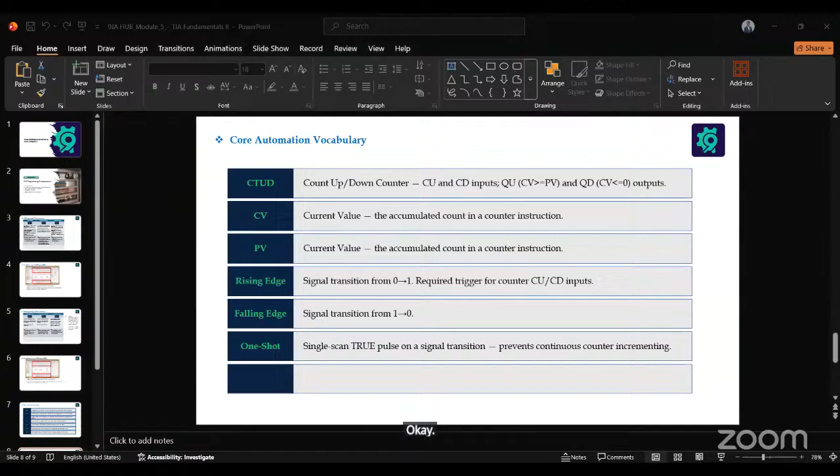So for today's class, we would continue on TIA fundamentals. We'll be looking at some other instructions that are in TIA. We've made use of move in the last class. So yeah, we'll be looking at counters and timer.

During the first TIA session, I did a simple star delta program and I was talking about TON, TOF, on delay, off delay. Some people were like, okay, how does it operate? What is on delay? Why are we using on delay? Because for someone hearing that statement for the first time, it would be like, why not try off delay? Why are we trying to delay the on sequence? Why are we not working on the off part of the program?

So we'll be diving into it today and you would see why we made use of the on delay and not the off delay the other day. By yourself, after this session, you should be able to know what to use and when to use different timers or counters for each operation. At the end of this session, we want to do a simple PLC program, like a traffic light control kind of program. So let's get it started.

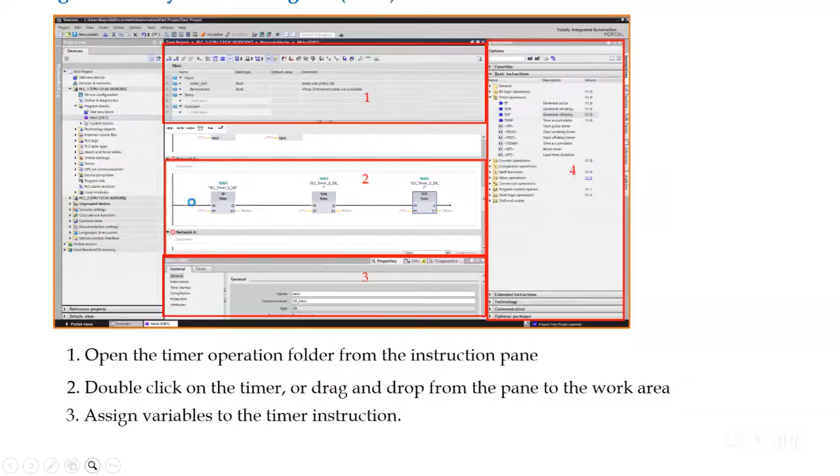So this part—let's say we put a normally open contact here. I hope you can see my cursor. Once this normally open becomes normally closed, the timer does not wait for another signal; your preset time just starts counting, starts elapsing. Let's say you set 5 minutes or 5 seconds—once this becomes normally closed and receives the signal, it just starts counting down: 5, 4, 3, 2, 1. Then once it gets to 0, the output comes on for the on delay.

So it doesn't need a signal for confirmation—it just needs one pulse signal, a signal that comes once, not one that comes frequently. For a counter, it needs a continuous signal—this signal comes once, then comes a second time, then again. I'm trying to think of a very good example where we made use of a counter. I can't place one right now, but maybe before the end of the session. So for a counter, it needs a continuous signal.

Mostly it's always connected to a sensor. So once you have your sensor, it starts counting—okay, this one has passed, this other one has passed.

Let's use a traffic light as an example—not the conventional one, I'm talking about the one for pedestrians. Outside the country there are some where you can press a call button. The call button lets the driver know that someone is on the zebra crossing. Then after a certain time, the traffic light goes from green to amber, from amber to red. Once it's red, the pedestrian can cross, and the driver has to stop.

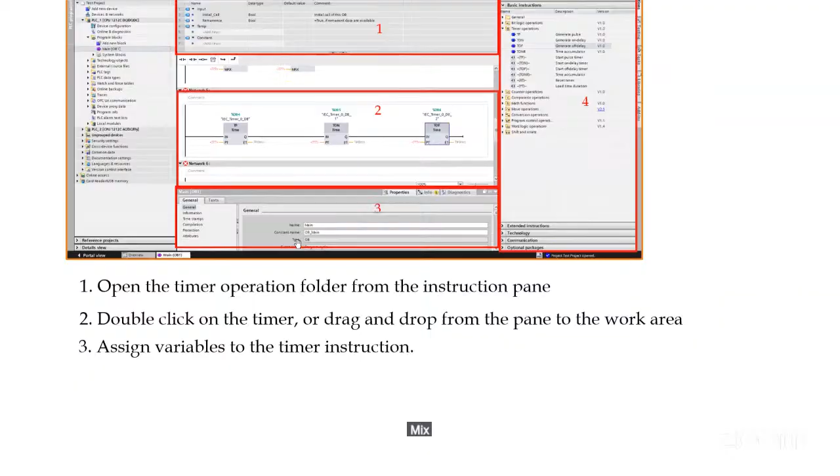So we've talked about counters, let's look at examples. This is a count up counter with a reset value. Most times a counter needs a reset because once it counts up to that value, you need to press a reset so it goes back to zero and then starts receiving a signal again to start counting. Then there's the preset value, that's where you put maybe you want it to be a 10 count, 20 count, or 30 count, whichever way.

Exactly, this is a very good example. Let's say you work somewhere they make biscuits, let's look at Prime Biscuit for example that produces cream cracker, Beloxxi, and all of that. They want to track the amount of cartons per day or thereabout, so they must have a counter operation going on.

Then it counts how many cartons are passing. Once one carton passes, it registers it in the counter's block. Once another carton passes, it registers it.

That way they can track the production and the efficiency of the operation. They can't use a timer in that operation because they wouldn't be able to track how many are passing. This one counts in units, and the other one counts in seconds, which is timer.

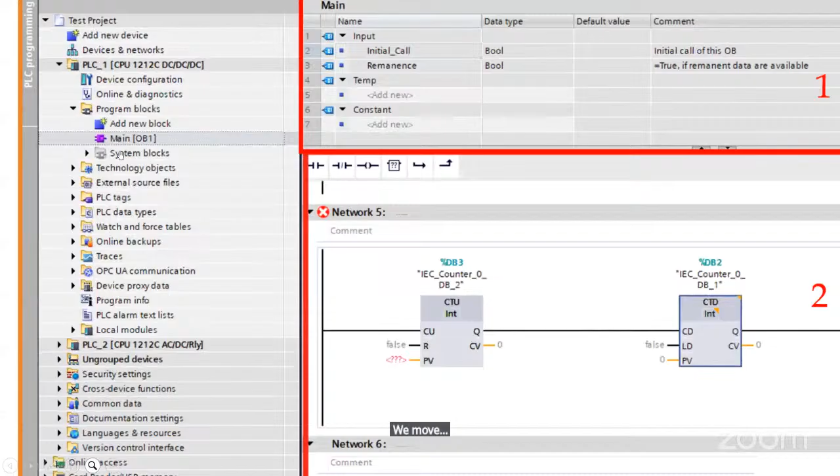So I think we're all clear with this before we move on. This is how it will be. For the TON, these are some vocabulary you mostly see so it doesn't seem strange. There's no priority because what happens with count up down...

How will I put it? Once it counts up, the output, look at this, let me go back, look at this. It has two outputs, QU output for count up, QD output for count down. So what happens is once it counts up, the output for count up becomes true. Once it counts down, let's say you set the preset to 5 and it's counting 1, 2, 3, 4, 5.

Once that 5 gets to it, the count up becomes true, the countdown becomes false. So initially, what's this thing? The default state for the countdown after you set your preset value and everything will be true until it counts down, let's say 5 have passed through it, it will become false and the count up will become true. So it's not like it needs priority or anything, it's just like on-delay and off-delay.

One will stay on for so much time. The countdown will stay on for the amount of time you say it should count down. Let's say you say it should count down 5, like 5, 4, 3, 2, 1, 0, once it gets to 0 the countdown will become off. But count up, once it counts up to 5, the count up will come on. So I think is that clear?

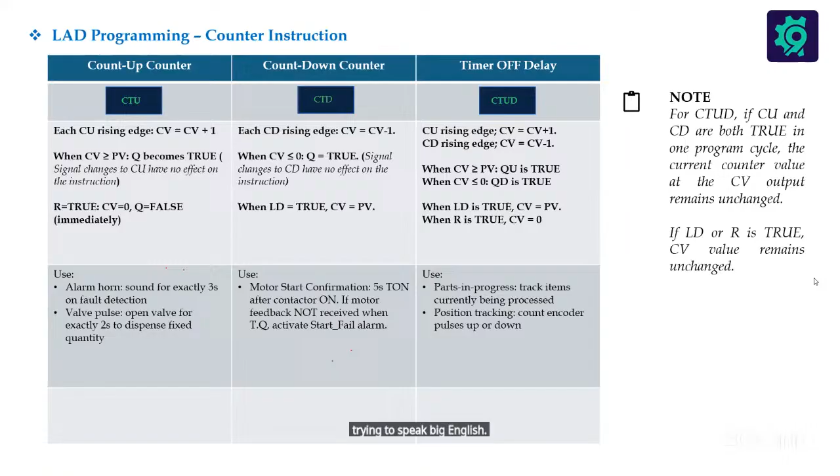So can a counter be used as a timer? Someone even put thumbs up. A counter cannot be used as a timer at times because... don't worry, instead of trying to argue or trying to explain, we'll do a simple example. Let's just stay tuned. We'll make use of a counter and we'll make use of a timer, so you see the difference instead of trying to speak big English. Can a counter be used as a timer? So I think that's all the questions we have.

We've checked this. So we are looking at the core automation vocabularies. These are symbols, terminologies, what you would encounter when you're writing some programs. You can see stuff like TON and you'll be like, how do we get here? What is TON? You can also see stuff like TOF, off delay, then TP, timer pulse, PT. So these are the parameters you have to set. PT, the preset time, the elapsed time.

Then we have elapsed time, count up timer, countdown timer. We have count up, count down. I showed you that. So for the count up, like the elapsed time, we have current value for counter. Current value shows you the amount it has counted. Like, okay, we already have 4. We've accumulated 4 counts, like 4 pulses, like that engineer said. Then preset value. This is the count value you want. Okay, we want you to count up to 5 pulses or up to 10 pulses.

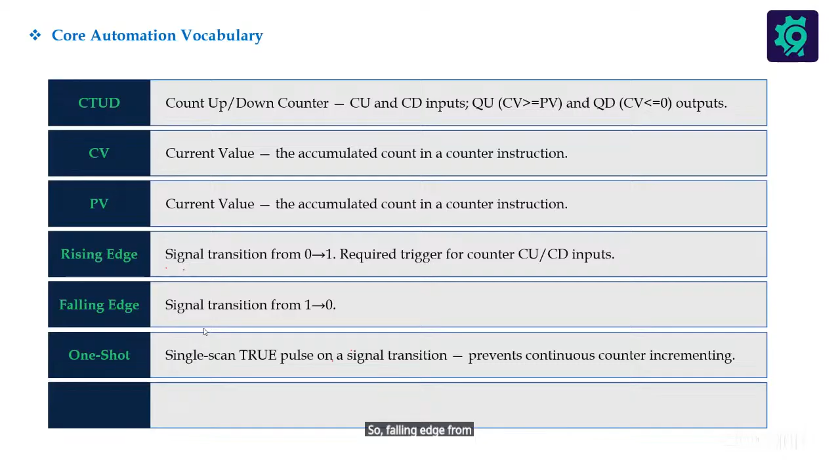Then let's see what else? Rising edge. So signal transition from 0 to 1 required, yes. So falling edge from 1 to 0, one shot signal can be used. So thank you very much. Let's do our normal going to TIA Portal and make use of counters so we can all be sure we're on the same page.

So someone asked a beautiful question in my DM the other day. I can't remember the person's name, but the person's question made a whole lot of sense. So the person was going through the YouTube live and noticed we changed.

So what the person asked was, sir, why do we change from input? I think I replied to the person. He said, why do we change from input to a memory when we wanted to simulate? So I would say there are different types of simulation. No, a counter is not an encoder.

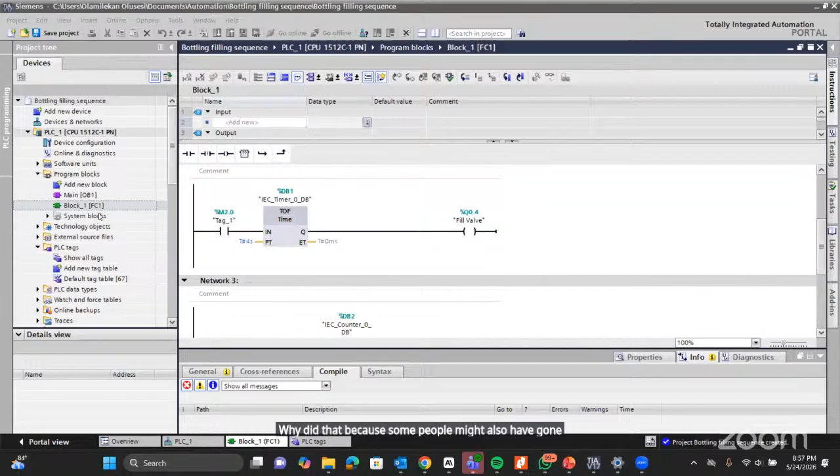So why do we change from an input signal like I0.0, an input address, to a memory bit when I wanted to simulate? I told the person why I did that, because some people might also have gone through the video and have that question. If you want to simulate, you have different methods of achieving that. You can use a force table.

Let me just do an example so we see what I'm saying. Here is a force table. We have watch and force table here. Look under force and watch table. You open. Sorry, please. I just want to clarify that so people are not confused.

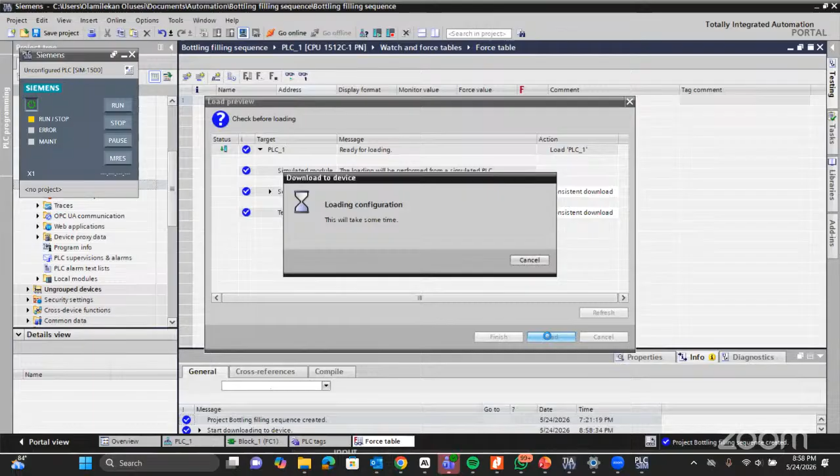I hope by this time we all know how to set up our PLC sim to start simulating your program. If there's anyone that still cannot set up the simulation, please let me know in the chat box. So let's go online. I've not called it in my OB1.

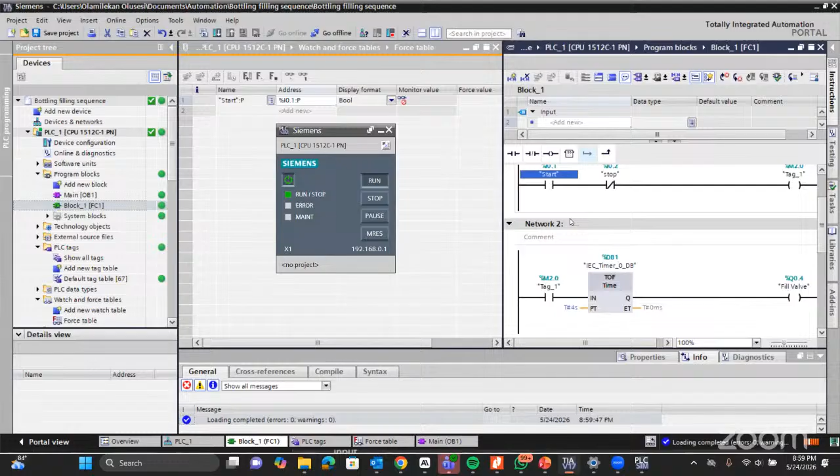Hmm. Yes, definitely. TIA Portal can work without network. You don't need data to use TIA Portal. Why is this not monitoring?

So look at something. Here I did not change it to memory. I forced it. Force bit, then it became one, and then the start push button is simulating like it has been pressed. Let me remove the force now, turn it to 0.

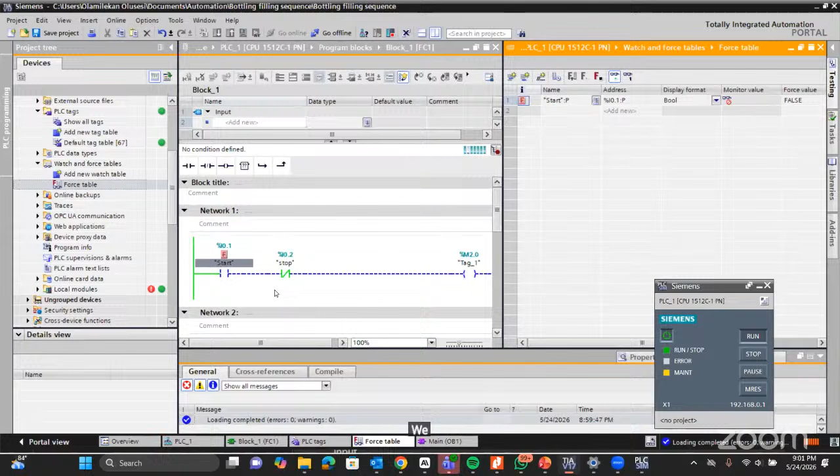It goes off. But if you want to make use of modify, this way you don't need to create a force table. It's another way of simulating signals. You can just come here and modify to 1. You see, it will not work because it's a physical address. But with a force table, it will work. So the reason I changed it from a physical input address to a memory was because we're not using a force table.

So, does anybody have any question on this? Please, if you have any question, let me see it in the chat. If not, let me know so we can continue.

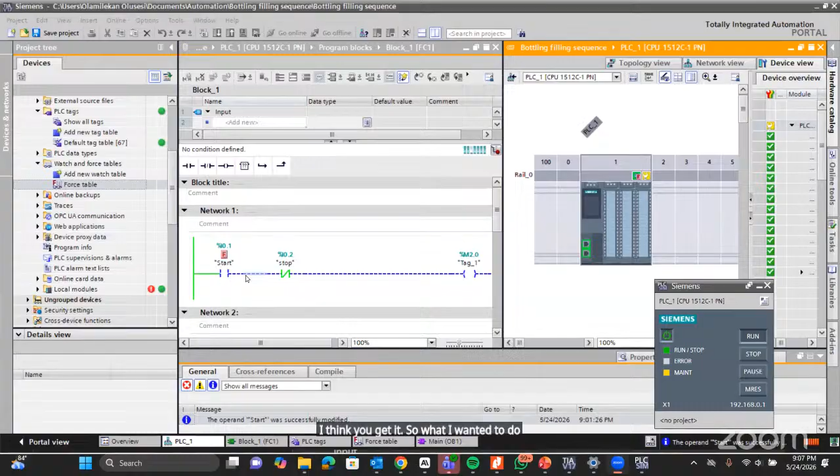So I think we understand this now. For the person that asked why I used a memory instead of the physical address, what I wanted was to be able to modify instead of having to create a force table. So I can also do the memory part here, let's say M1.3, compile and download.

How do I handle multiple inputs that need to run simultaneously for a small project? Exactly, you can create a force table, then put all of them inside. You see the way I drag and drop it there. Put all of them inside, modify, and then turn it on.

So look at this now. Instead of forcing the signal, I can go under monitor, modify to 1. Then it has become 1 here; it's active already. Modify to 0, instead of going through the stress of creating a force table. So I think we're good on this.

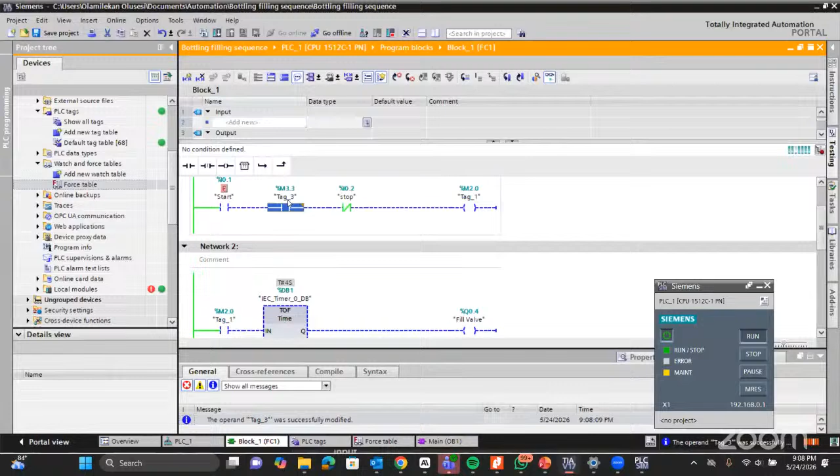Now let's look at an example on how to use your counter, timer, count up and count down. I think I have something here already. This is an off delay timer. For the person that used the off delay timer and had an experience with it, let me display what an off delay timer does for you.

So for this, for the start, let's force value to the start now. Let's force 1, yes. Look at it. The output is already true. Then I brought the output down here. Look at this now, the fill valve. The fill valve is already active. That means, let's say, the filling has started.

Let's now go back and force this back to 0. So that means the start push button has stopped. Look at this. The fill valve will still remain on, will still remain open for 4 seconds before it goes off. Let me increase the time so maybe we can see it. 10 seconds. No, let me use 7 seconds.

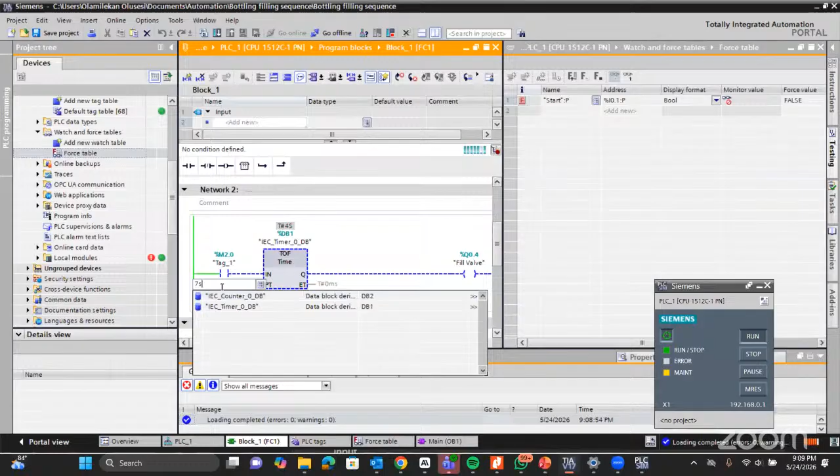So let's now come up here again. Download. Force it to 1. Then let's force it to 0. So look at this. The output is still staying on even after the input signal has been cut off. It stays on for 7 seconds, then it goes off.

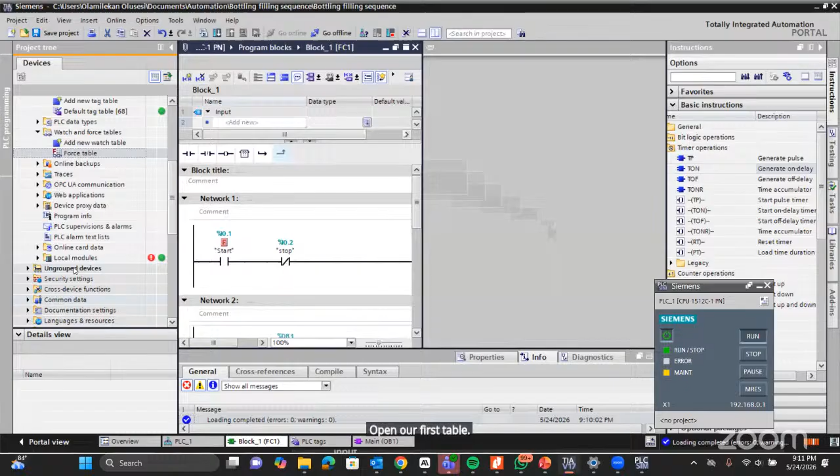So now let's make use of an on delay. Just want to show us what these guys do. Instruction, timer, on delay. Okay. So let's put the same 7 seconds. Let me remove this. So open our force table. So just fix your eyes on the fill valve. Let's force this input to 1 now.

Oh. Sorry, I stopped monitoring before. Hold on, please. Let me download this. Then go online. Let's open our force table. Let's force it to 0 first. Yes. So notice what happened now.

For off delay, the other time, once the input signal goes off, the output still remains on. But for on delay, once the input signal goes off, the output goes off immediately. So let's turn on the input signal now. See, the output does not come on until after 7 seconds.

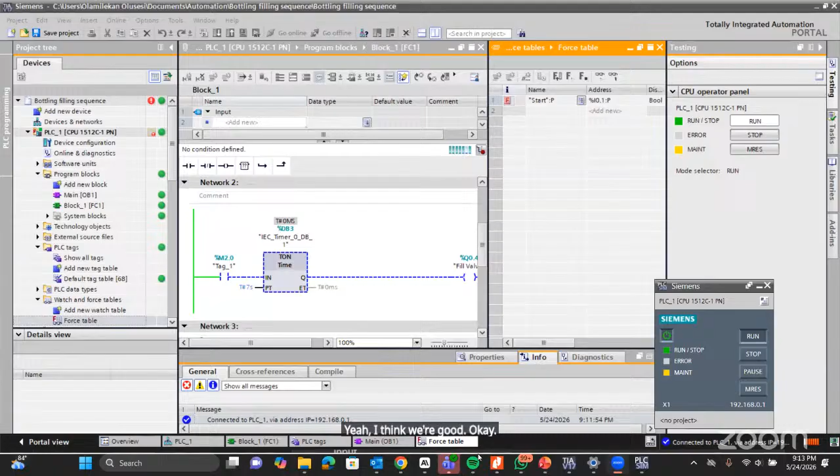Yes, Sarah. Diamond. I don't know why it's always the two of you I'm always calling. Adeboye. I think we're good. Yeah, I think we're good. Okay. Okay, sir. Yeah, let's move on.

So let's go to the counter sequence. Let's make use of count up and count down, then let's do something. So we've seen how this operates now. Let's now go to counter. I think we can delete this and bring in a counter instruction. I think instead of even going through that, you can just bring an empty box from here. Change the name to counter. Maybe we can do that. Nope. Let me just drag it.

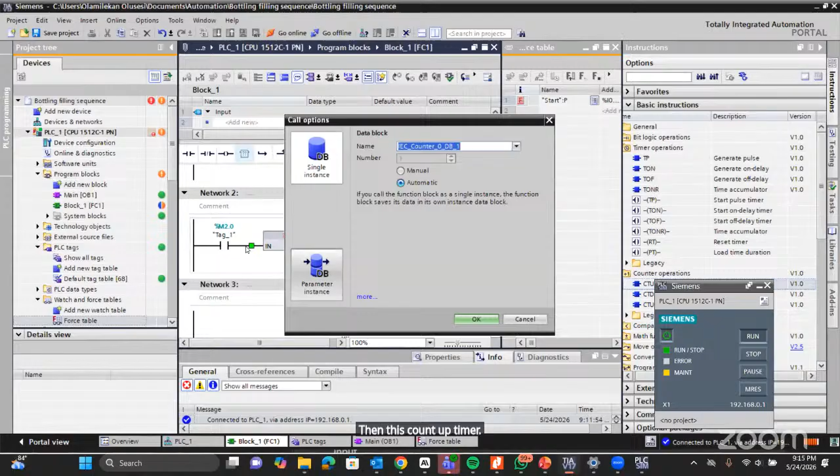So you come to your instruction bar. From your instruction, you can see we have timer, we have counter down here. Then this count up counter. So let's put our preset value to be 6. Then this one will be showing the count value. You can address this to an output. If you want to be showing how many items have been counted, you can tag this to an integer output and display it on an HMI.

So you can display it on an HMI, showing how many people have passed, how many cartons have been packed, and all of that. So let's download. Okay. So look at this. This is the count value now. It's at 0. The preset value is 6. Count up counter. It has not received a signal. That's why everything is still 0.

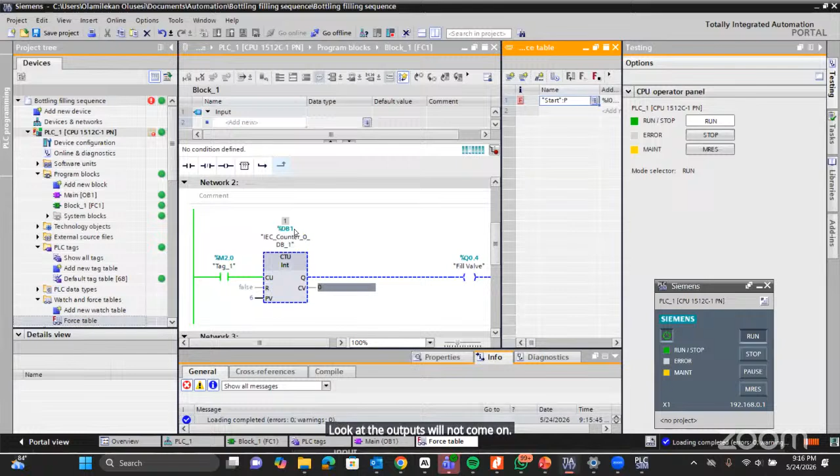Let's change the signal to 1. Look, the output will not come on. But the counter has shown that it has counted 1 already. Let's now do it until we get 6. So what we need now is for the input to go off. I should have just used 3. Well, don't worry. For it to now come on again. 2. Go off. Come on again. 3. Go off.

So this is not like industrial practice. In industrial practice, you can make use of a sensor for this counting sequence. So a sensor might be the one sensing maybe a carton passing, a bottle passing. So it should just be counting how many bottles have passed. So we already have 4. Let's do 5.

5. There's another one first. 2, 6. Look at, on the sixth count, the output became true. So let me now do something. Let's take it to 7. You see it. Okay, no, it's already true. Let's take it to 7 and see what would happen. So since the output is already true, it will remain true even after it gets to 10, 100, 1000, you just continue to count up that way. But once it has gotten to your preset value, the output becomes true.

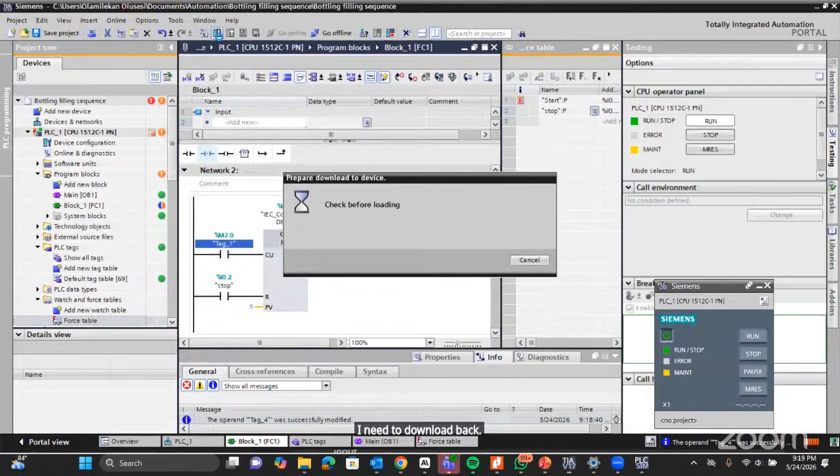Please let me know if everybody is clear on this also. You get the way I did that, the output and the input part. Yes, yes, definitely. Let's make use of a physical address. Let me see, I already have my start and stop. Let's make use of stop. So look at this now. As it stopped, I can bring it to my force table. I need to download back. Yep. So now, no. Let me just change this to 2, so we don't have to start doing the 1 to 6 again.

So let's count. 1 comes on. Okay. Yeah, 1. Then let's force it to 0 back. So on the second count, the output comes on, because I changed the preset value to 2. 0. So now the reset, since it's a physical address, you can force it from here first. Let's force it to 1. Yeah. It will reset it. So it can also be a physical address or a memory, whichever one. So I think we're good now. Let me know if we're good on count up timer.

So let's make use of countdown. I'm not hearing anything, no. I don't know. Maybe. Anita, if you are with us, let us know if you are good. Ayodeji, Nicholas. Are you also good with the count up? So, okay. I think Nicholas is active. So let's use countdown now.

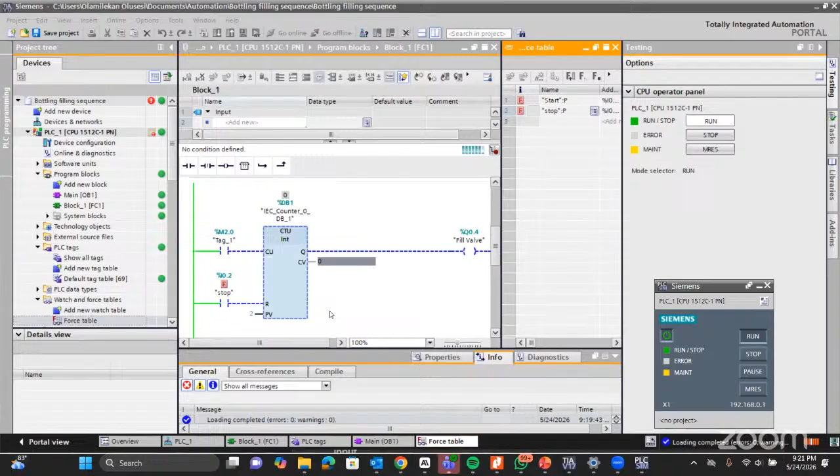Let's make use of countdown. Go to instructions, count down, delete, delete. Preset value, let's make it 3. And let me see if I can. A quick way to also know, let's say you are using a block for the first time, you've not encountered a block before, maybe counter, move block, anyone, and you don't know what parameter can I put in the LD, CD, PV port? You can use F1.

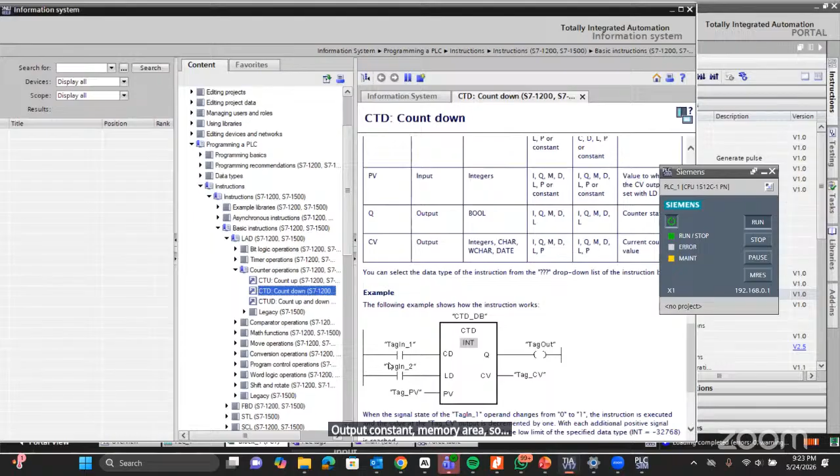Just click on the block now and press F1 on your system. Why is it not showing? Let me see. Okay, still loading. Hold on, please. So it will give you information about that block you brought out. Look at this countdown block, this counter instruction. So it will explain everything you need to know about it. Then about the port that is available, the LD port declaration, you can put an input bit there, in memory, anyone. Look at it, bool, PV. You can set an integer there, output constant, memory area. So you can read about it. They can even show you an example of how they use it.

You see? So this can help you in cases of new blocks you are not used to. So I'm just trying to show us. It's not every time, maybe you are seeing a block for the first time, you don't know why they use it in that program. You just click on F1 on your computers. For some people's laptop, you might need to press FN then F1 before it works. But some people you just use F1. So I think we're good with this. So let's make use of the countdown. We set it to 3 and then let's now download.

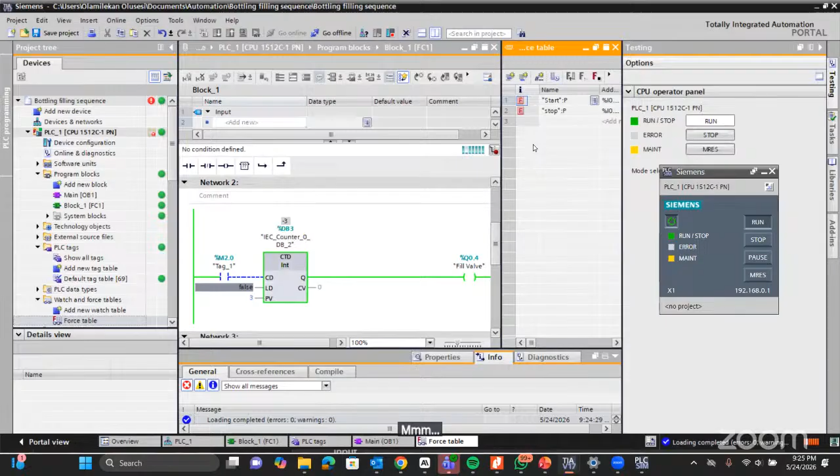What do you notice there now? The output is already true even before the counting operation starts. So what happens for countdown is once it now counts to 3, it resets the output. So let's do that. Let's force it to 1. 1 minus 1. So it's minus 1 from that 3. That's 2 like that. Sorry. Force to 0. Minus 2. Then hold on. I think I made a mistake somewhere. Supposed to reset. Download.

Let's go right again. Let me modify this to... okay. 0, 1, force to 0, then

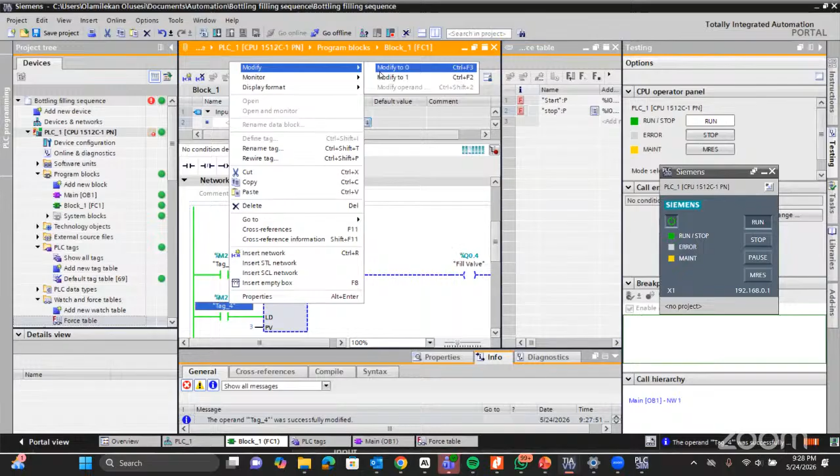So we can now get, the same way a count up counter has a reset, this countdown counter also has a reset. What this countdown counter does is once you energize this, look at this. Let me change. Is there a way I can change this here? Okay. Let me change this to 4. Download.

Hold on, please. Just have to force it. That's why I used to prefer modify to force. It will now start counting down from 4. So initially you need to activate it. Let's say you set your value to 10. You have to activate the 10. You click on it. You can put this to a physical push button or a memory or something just to trigger it. Then once you put it in, it's 4 we're counting down from. Then you start toggling this on and off, the pulsating signal.

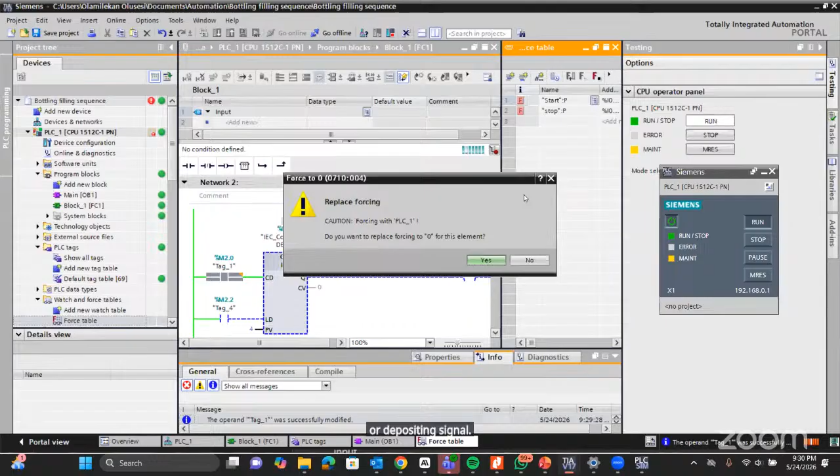Turn this off. Turn it off, on again. So we need 2 more. One more. And the output comes on. So once your output is active, you can also now come here, modify to 1, and your output goes off. And then it loads the 4 again. So it needs another 4 signals for your output to come on.

So do we have any question on this? I want us to carry out an exercise before we end this night's session. Please, if you have any question, let me get it in the chat.

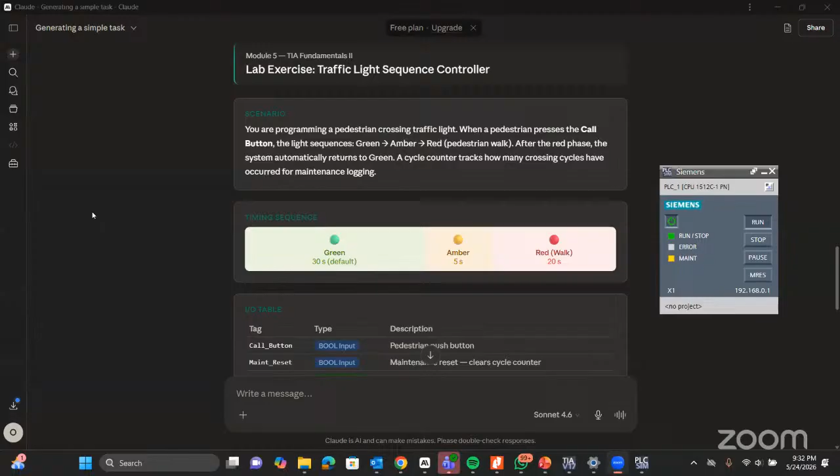I think there's no other question in that regard. Let me read out what we are working on. So can you all see my screen? One scenario: you are programming a pedestrian traffic light. I would like us to use the chat box so I will know if the thumbs up is for yes or for no. Okay, I think you can see it. You are programming a pedestrian crossing traffic light.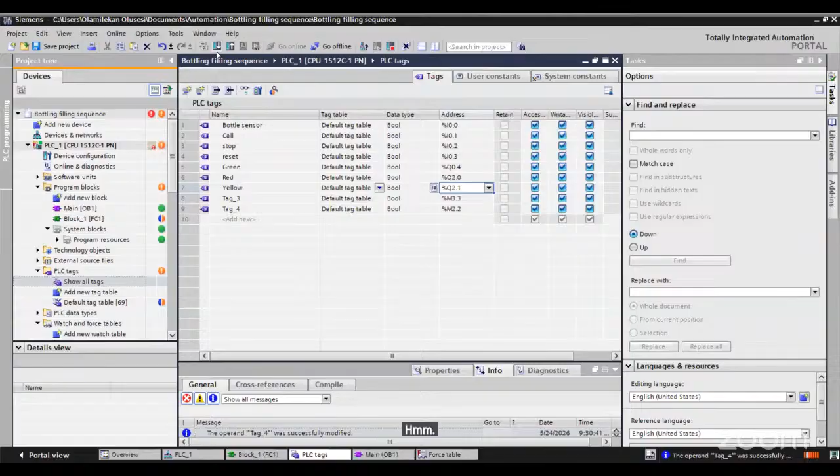I know what's going on. Let me go to my main here. So once the person presses call, it activates a memory. So let's make it a memory.

Activate a memory M0.0. Then we use the memory to trigger our timer sequence. So from the question, it says when the pedestrian presses the call button, light sequence: green, amber, red. The green is the default light. It stays on for 30 seconds. After that, the amber comes on for 5 seconds. Then the red comes on for 20 seconds. At that 20 seconds count, the pedestrian is expected to cross the road. So this is what we do.

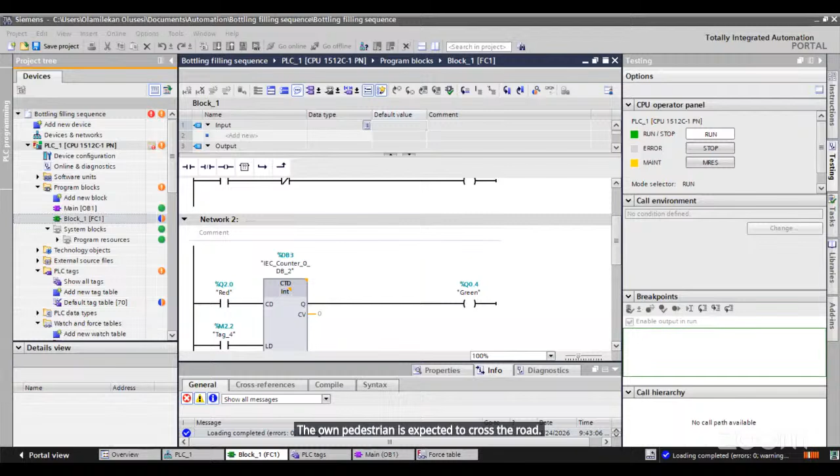So please, I would like someone to tell me in the chat which kind of counter do we use. Note, the question said it should stay on for 20 seconds after the pedestrian has pressed the call push button. So which kind of timer should we make use of? It's not like I'm the one writing the program. We are writing it together, or you are even writing it, not me. I'm waiting on Michael Sama to say his own. Let me hear from someone else so we'll know.

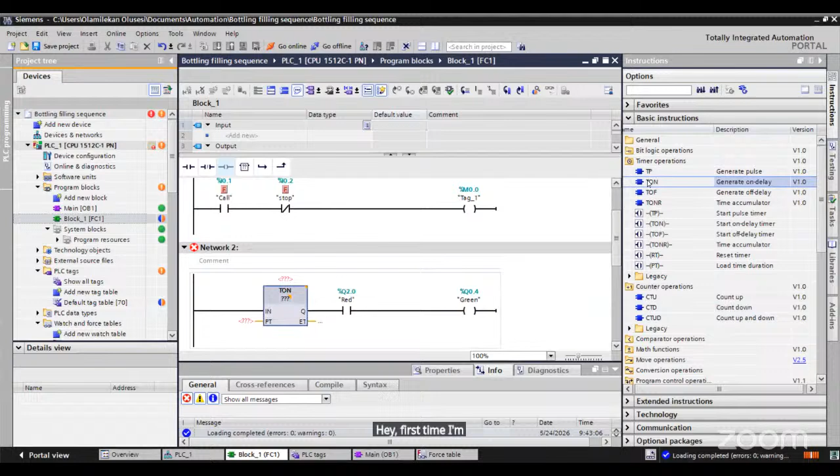So I'm making use of an off-delay timer, which is very correct. Because note, the question says after the signal has been pressed, that means it should stay on for 30 seconds after it has been pressed. So we bring off-delay, insert it here. Okay, delete this. Engineer, so what happens? Delete, I was just joking. So this is red.

Red, and output to red. Preset value 30 seconds, we'll be able to wait for the 30 seconds. Let me just use 20 seconds because we start waiting for 30 seconds now and be checking the time.

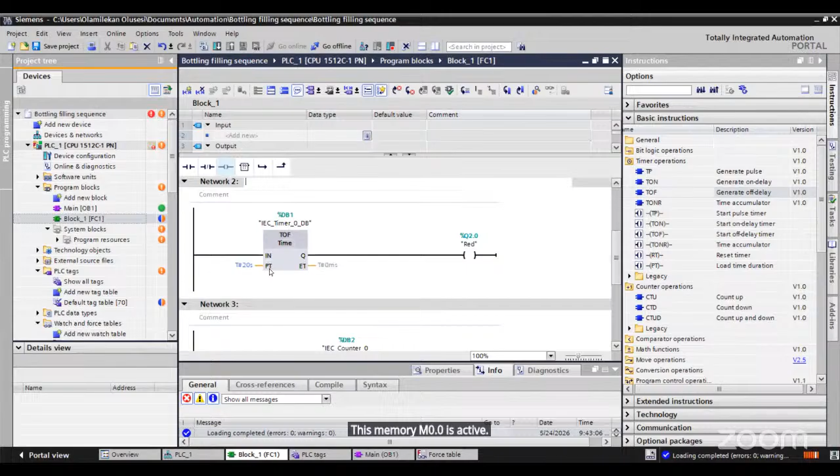So what happened there is once the person presses the call, this memory M0.0 is active. Then M0.0 comes here. Then activate this. Then let's say, okay no sorry, not the red, it's the green. Green should come on first.

Then for the next light, they said once the green is on for 30 seconds, after the green goes off, the yellow amber should come on for 5 seconds. So how do we do that? Let me know in the chat so it does not look like I'm the one typing everything. So what the operation says is after the green goes off after 20 seconds, the yellow should come on for 5 seconds.

Not stay on, no, come on for 5 seconds. So how do we do that, please? I'm not saying nobody's talking, no. He said after the green goes off, the yellow should come on. Okay, Michael Sama has a point, said the green signal. Okay, I'll be doing it the way I'm saying it.

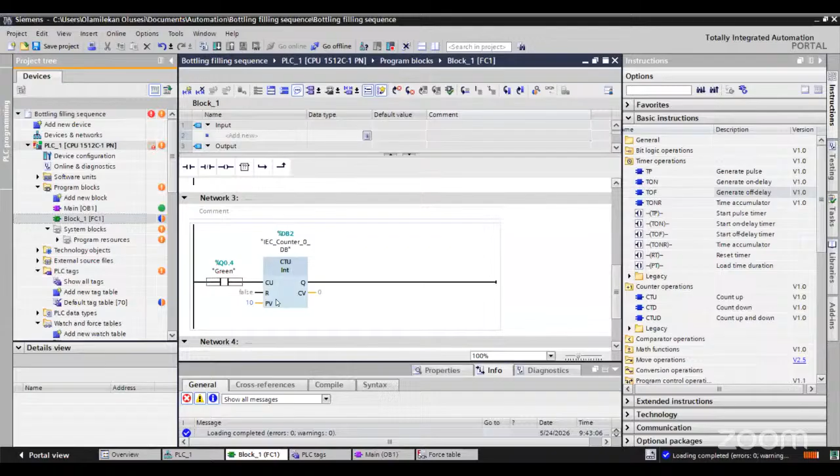So I'm still trying to get people's opinion before I do it now. When signal turns on, I'm not making use of count up timer, sorry, count up counter, sorry. Someone said the green signal should turn on the amber, TON.

Remember, if you are using on delay timer, once the input signal goes off, the timer will not work. And this one says after that one goes off, the timer should work. I'm expecting someone to say something that we did in our last class. Is it last class? Yes, I think. We made use of something, and nobody's remembering the thing.

If we are using normally closed contact of the green, so put normally closed here. So what happens is whenever the green is on, this will not come on. So when the green goes off, the on delay timer starts counting. Then if the on delay timer is counting, remember for the on delay, the output does not come on until after the time elapsed. But for this condition, we need the output to be on until after a certain time. That's when it should go off. There are different methods to writing this, not latching.

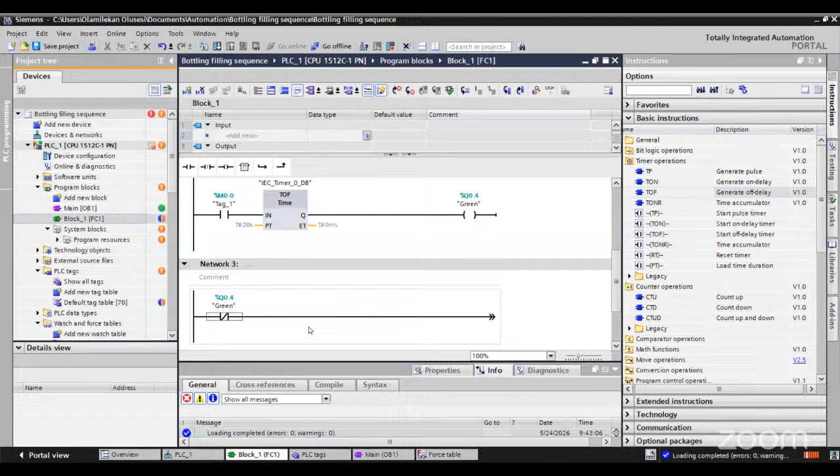If you use normally closed contact with an off-delay timer, remember that for an off-delay timer, the light stays on immediately it receives signal, and only goes off after the timer counts down once it stops receiving signal. So when we're using normally closed, once the green goes off, it starts receiving signal and there's no way to cut off the signal. So the off-delay will not work.

Just waiting for one more person, then we'll go ahead and solve it. Let's just do it. Let me just do it. Someone said something.

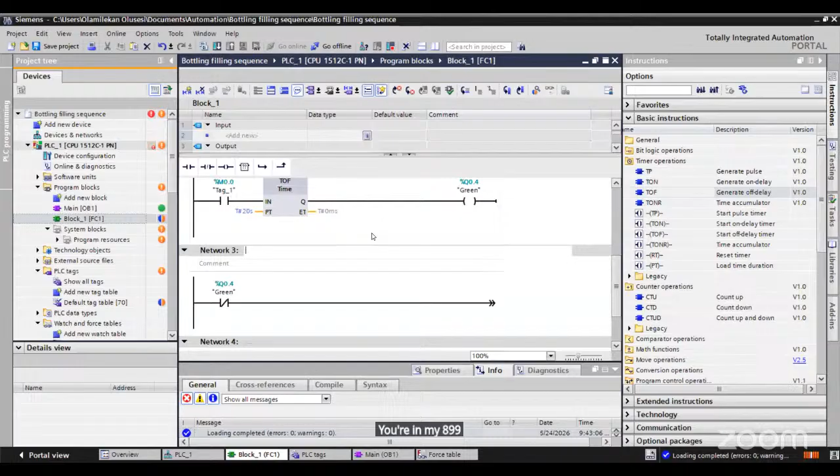Like I said before when we first started this class, for programming there are different methods to achieving the same output. The way you might write it, another person will write it differently and still achieve the same result. So what the question says is after 20 seconds, the green stays on with off-delay, then after 20 seconds the green goes off. Now we want it that after the green goes off, the yellow should come on for 20 seconds also. So how do we do it?

Once the green goes off, I want us to use anything we've taught, not negative edge. I know you are a senior man, Victor, so I don't want us to use negative edge signal. Do we do negative edge? I don't think we've touched negative edge, that's why I don't want to bring that up. No, we didn't do negative edge.

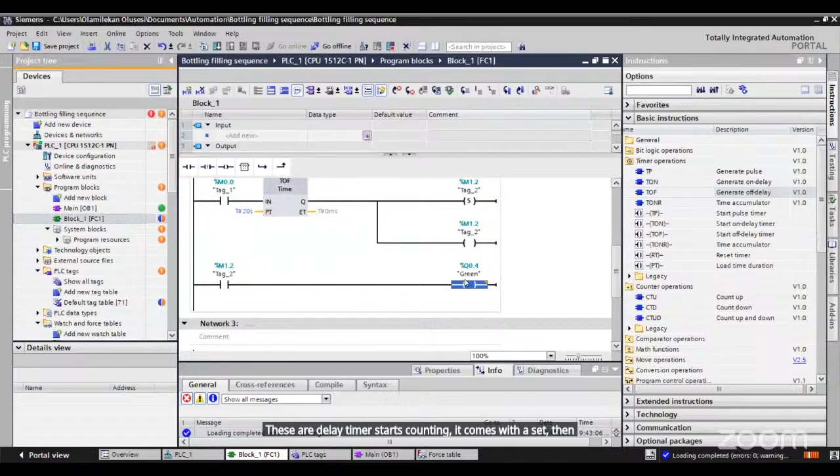So what would happen here is once this off-delay timer starts counting, it comes here as set, then the green light comes on. Then after 20 seconds of counting - I don't know if anybody can hear me, please just thumbs up or something.

Okay, I think we're good. No, we cannot use 1.2 two times.

And some people have a lot of questions now. So what I did here is once the call button has been pressed, the green comes on. Once the green comes on, after 20 seconds this still remains set, this goes off. So what do we need? We need the red to come on. So we bring it here, normally open.

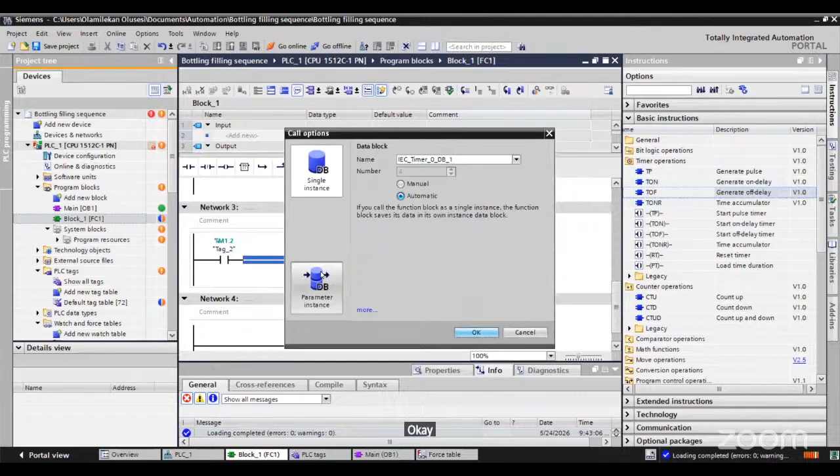M1.2. Then you bring - I just want to make sure that we're using everything we've talked about. Bring an off-delay, put it down here. Bring this here. Put, let's say after 5 seconds, then the output should be red. There's a shorter condition we could use, but I want to make sure we're using the on-delay, off-delay, set, reset, and all of that.

So what happens now is once this goes off, the red comes on. Yep, yep, yep, yep, yep. So bring another one here, put another delay timer.

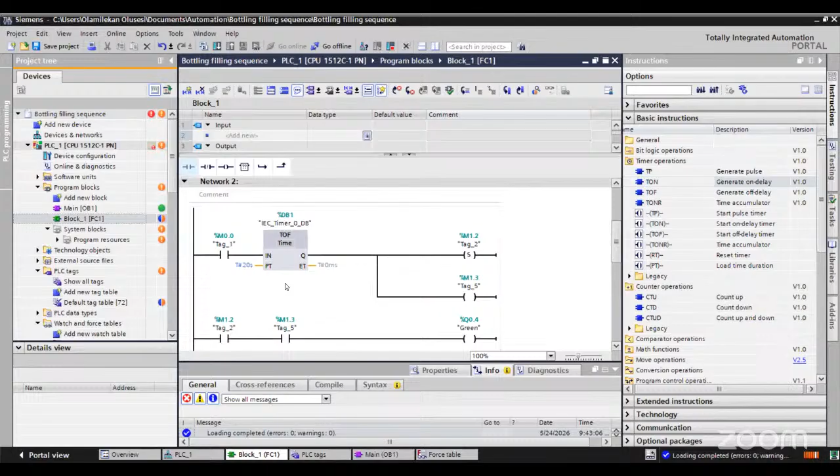Hold on please, sorry. Trying to look at the way we can just utilize all of these blocks. So we bring in this signal from our set, put it down here.

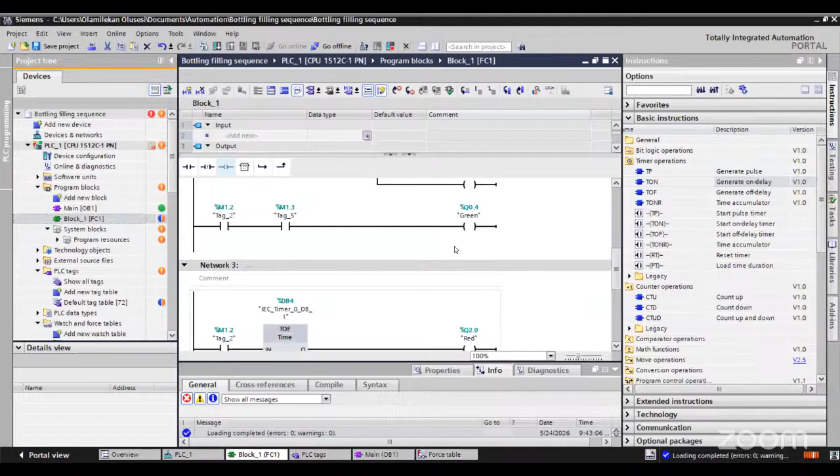I'll explain what I just did in a moment. No, I was not saying anything before. So what I did is once the call button has been pressed, the off-delay timer, after 20 seconds - once the call button has been pressed by the pedestrian, then after 20 seconds the green light goes off, then the red light comes on after 20 seconds.

So what I want to do now is I want the red light to go off after 5 seconds. This is milliseconds, not seconds. So we'll simulate it and see the operation.

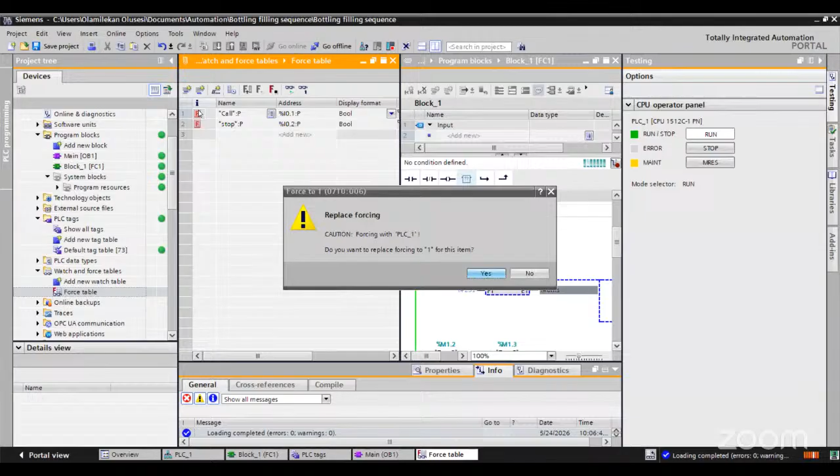So now the green light is on for 20 seconds. While the green is on, I'm not expecting the red to be on. The red is not on. 96 something, yeah. Okay, okay, I know why.

So the call button modified to 1. Let's see. Someone said, can I please? No, the code has not been set to be sent soon. It's very fast during the first action, so I was unable to catch up.

Yeah, okay, let's do it. Let me do the first again. So bring your force table, force call to 1, and force it back to 0 so that the timer can start counting.

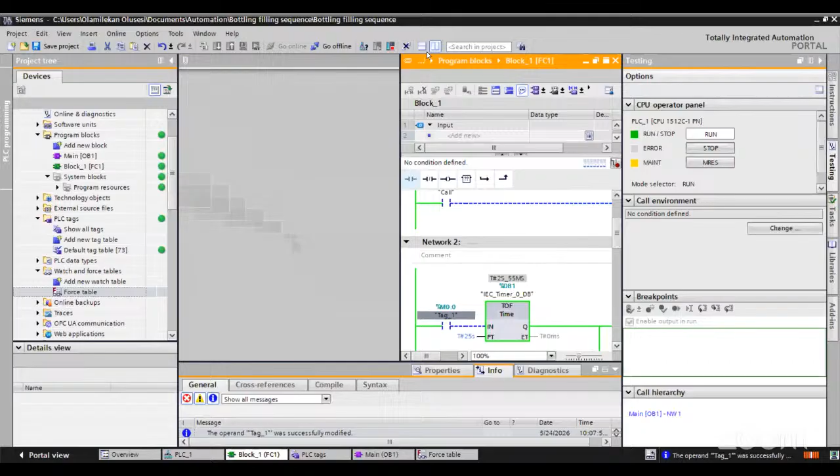So now the green is on, and then it's on for 25 seconds. Let's just see it on for 25 seconds. While the green is on, the red is not on.

The green is still on. The green is off now. Trying to see why this guy is going off immediately.

Oh, I think I get why it's going off. Let's change this to off delay.

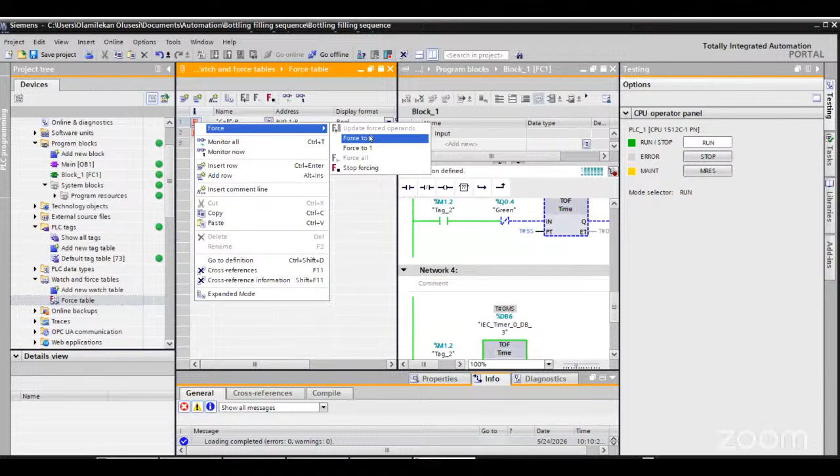Force table, split your screen. Let's force the call to 1. Force the call to 0. So the green is on now, and the time is counting for 25 seconds.

I don't know why this red is not coming on. Hold on. Trying to get why the red is not coming on.

I don't want to use any other command except this timer. If not, we would have just done it to its negation and all of that.

Attendance code has not been sent to this engineer asking for attendance code. It will be sent after once we do the green and red, I'll send the attendance code. I just want us to see how it would operate.

So this comes on, then after 25, once this goes off, I want this to come on for. Okay, I think instead of that.

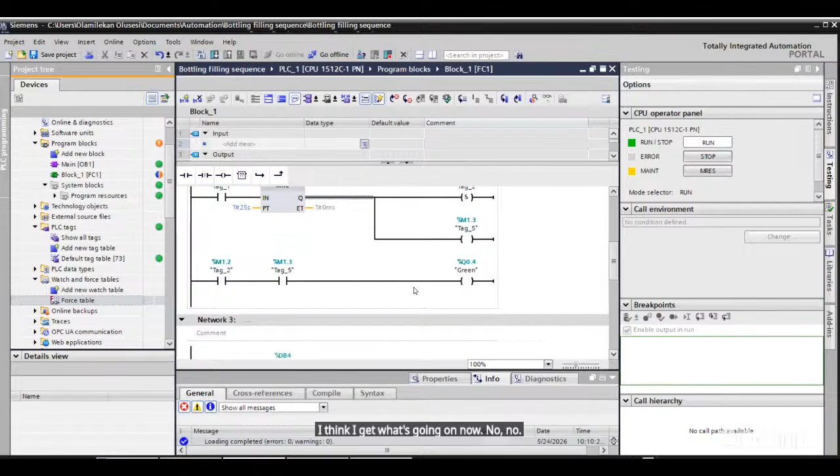I think I get what's going on now. So the green is off. The green goes off normally. So it's how to turn this red on that we're looking at.

Coming, the normally open here. Where is this guy?

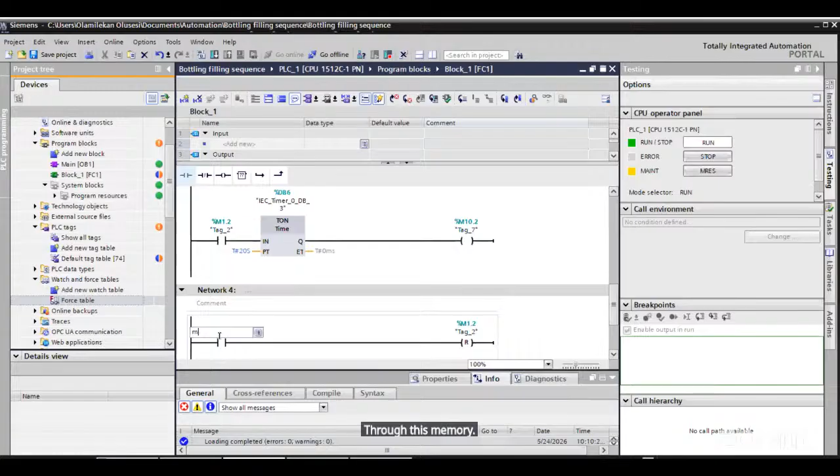Put this to a memory. Then for instructions, say should stay on for how many seconds?

No, this will work. Positive and negative edge would work seamlessly, but I want us to make use of this. Let me put it, say it stays on for 5 seconds. After 5 seconds, and the 3, it will come, it will work now.

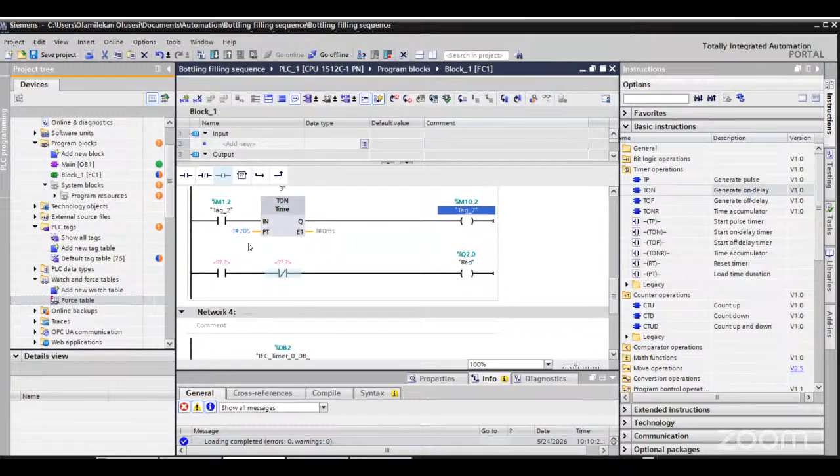Sorry. So after 20 seconds. Yep, so this will be the red now. Ooh, finally.

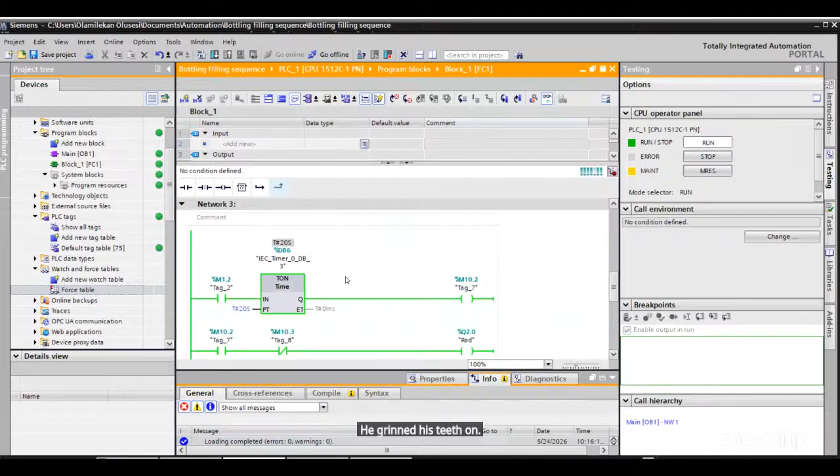Then the green is on. Our red is not on. The green is still on. Our red is not. Now our red is on. Hold on.

Okay, 25 seconds, yes. Now our red is on. The green is off.

This 5 seconds is too short. Let me make it longer so you can see the operation. Let me make it like 20 also.

So let's just look at this, sorry, for the last time, and then we can call it a night. I've not added the timer. Maybe in the next session we'll add timer and all of that for this before we start our class.

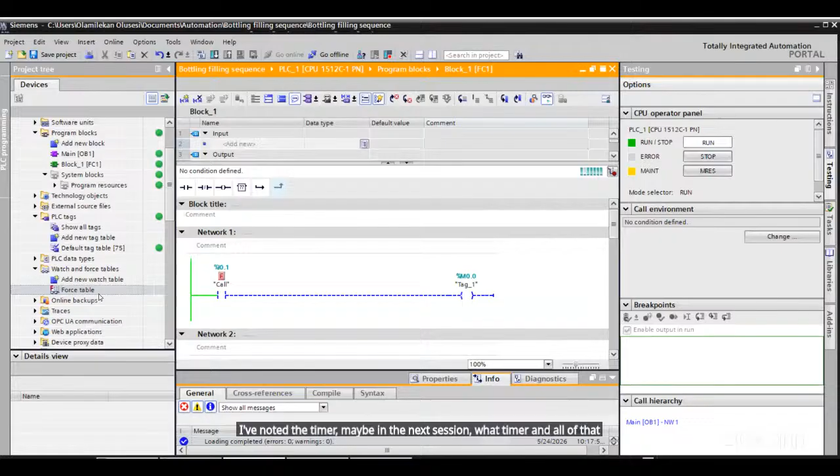Let me split this into two. First, the call part. Yes. Then force it back to 0. Okay, close this. And this, okay.

The green is on now. Then the green is staying off for 25 seconds. So let's look at the red. The red is not on.

So let's let the green go off first. The red is not on yet also. So our green is off now. Our red is supposed to be on now.

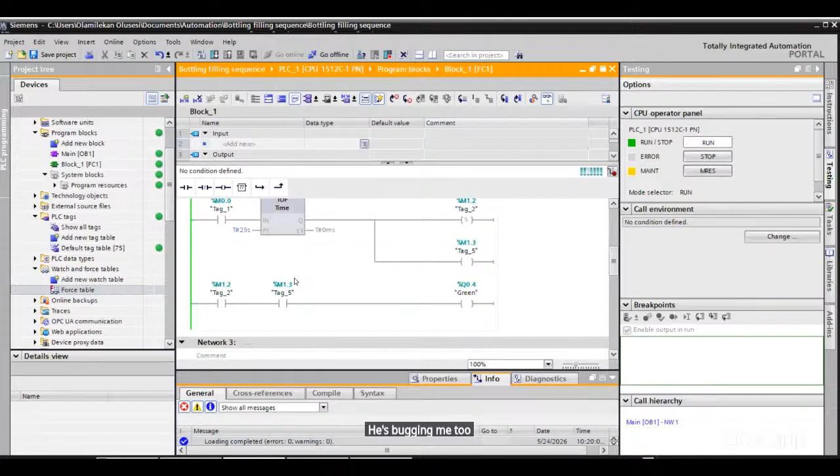So for this, let's force it. Let's force a value to it now. Split our first table. One. 0. Boy, oh boy. It's bugging me. So look at this. The green is on. Trying to see why this is. Okay, this is coming on immediately.

Hold on. I'm confusing myself. Yeah. M10.4. I did not reset the set part, so the set is still saying set. So that timer is just counting. Where is it here? This timer is not operating. That's what I'm looking at. That was going on. M1.2 reset. M1.2. So it's still assuming that it's on for the simulation. So let's download now.

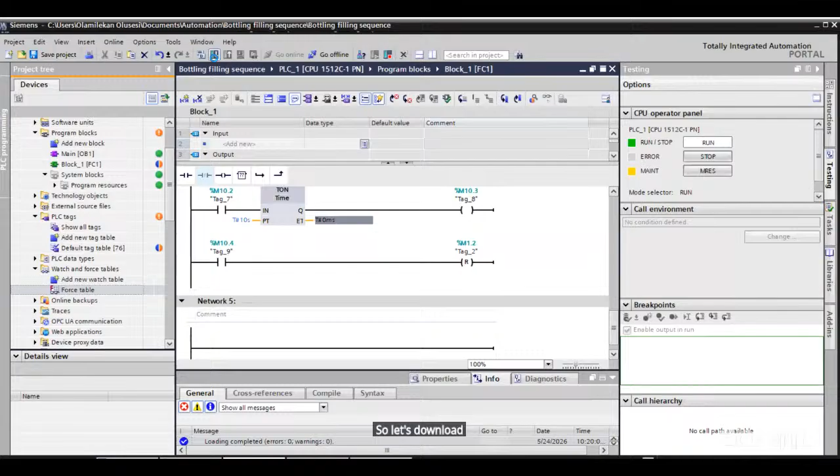So now I've reset that. So now let's do it now. I think this is the last time we'll be having to do all of this. So please just look at this now. I will also share their question on the group. So let's force it back to 0.

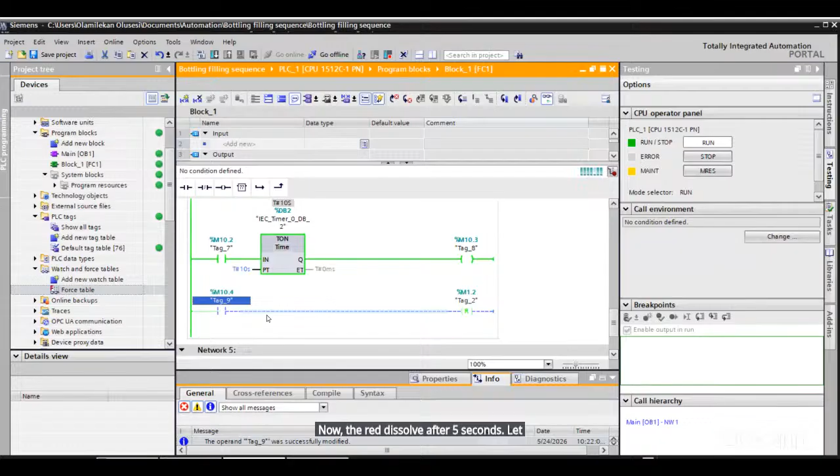So look at this. So the green is on. The red is not on. Now the red is off after 5 seconds. Let me increase the time so we can see. After 10 seconds, so the red went off. The red went off too fast. That's why we didn't see it. This is the red here. It came on.

Let's reset this. Modify to 1. Modify back to 0. Download. The code has not been shared. After we finish this now, I'll share the code for everyone. So let's modify. Let's just use the force table for the last time. So let's force this to 1. Yes. Force it back to 0.

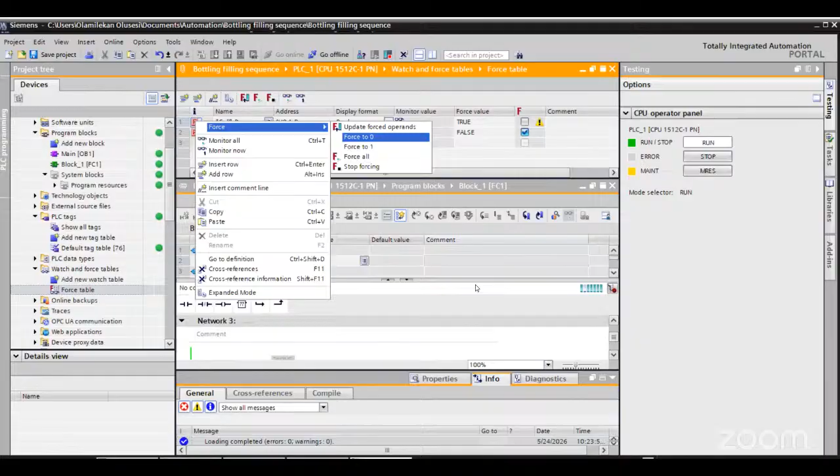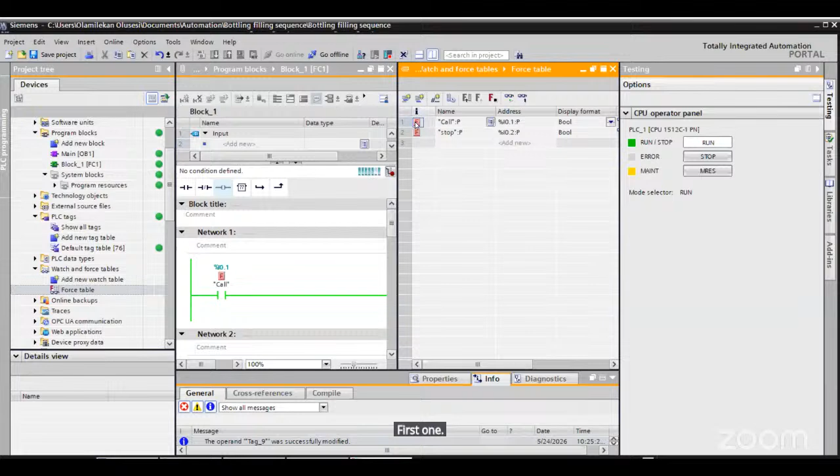Oh, sorry about that. So this will be the last thing we'll be taking. Let's just modify this. I just want us to see it work. Force to one, then force to zero back, to simulate the call push button. And now let's stop splitting the screen. So our green is on, our red is off.

So after 25 seconds, sorry, just see this. Once this operates, then I'll share the code. 25 seconds, the green is off. The red is on now. So the timer for the red is counting also. So after the time has elapsed, see the red is still on and the green is off already. So once the timer for the red elapses, the red goes off. So we can add the command for the yellow and then add the counting sequence. Just to save our time, maybe when we are doing the attendance, I can be doing that for the yellow, so we'll see it all.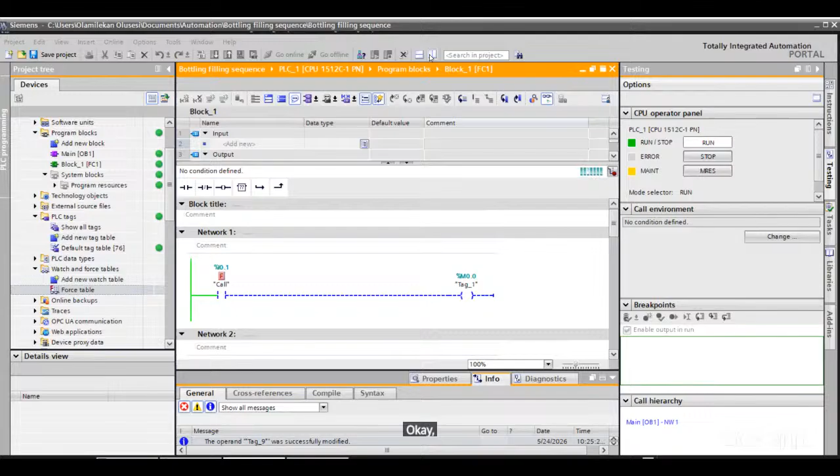Okay, the program. Yes, yes, yes. Like I should do it again so you see the operation, right? Okay, not the attendance code. So for the last time, for the person that just requested for it, let's modify this.

Mr. Kenneth, your situation is peculiar. So let's simulate the press button. So the press goes from 0 to 1. That means someone has pressed it already. Then 0. On its own, over and over again. Yes, like repetition. I get that, but we will do a typical street light on Tuesday. I think we should do something like that.

Why this now? Because look at the question we're working with. It stated that it is when it is pressed. It does not say a typical street light. What this does is it tells the driver to stop, that someone wants to pass the road, so stop so that the person can pass. That's what this one does. Not like the normal conventional street light we have around that will just go red, yellow, and green. We can do something like that too. What that one will do is once it gets to red, it will start again. You can do that here.

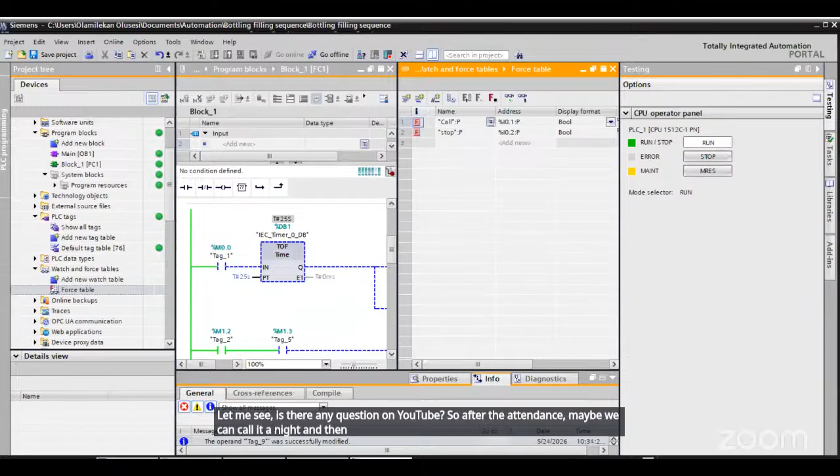Traffic lights. I didn't get this question right. You said traffic light programming, real help in real life industrial. Abi, what's this? I didn't get the question, please. If we can rephrase or something.